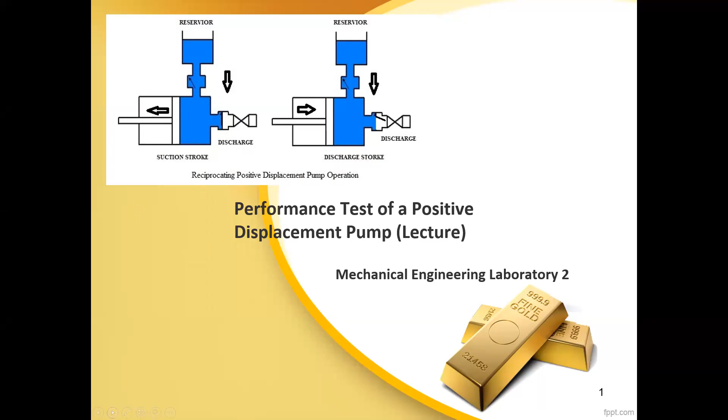Ang reference natin is yung power plant ni Potter. So, reciprocating pumps. For many years, reciprocating pumps were the only type of pump used in power stations. Today, they are used only where the flow is too small for the satisfactory design of centrifugal pumps or where there is moderate capacity with high head. High head, moderate capacity.

So, approximate ranges of application of reciprocating and centrifugal pumps are indicated in Figure 1. So, ito yung range niya. Capacity, yung boundary. Reciprocating dito, side, ito. Tapos, yung centrifugal, itong side. So, ito yung mixture, sa mga service range.

So, pag nagpipili kayo ng pump, pumasok dito, 100 GPM, then 1,000 feet. So, reciprocating pump yung gamitin mo. Hindi pwede yung centrifugal kasi ang baba ng flow niya. Okay? So, specific locations of reciprocating pumps in modern power plants include condensate and boiler feed pumps in small installations, evaporator feed pump, fuel oil pump, chemical pumps for feed water treatment, etc.

Kaya hindi laging centrifugal. Among advantages of reciprocating pumps are their flexibility of operation, their nearly constant efficiency for wide ranges of changes in capacity and head, and their ability to handle small volume at high head. Disadvantages include oil contamination of the steam, packing and valve troubles, pulsating flow and head, higher cost, greater floor space, and complexity of moving parts.

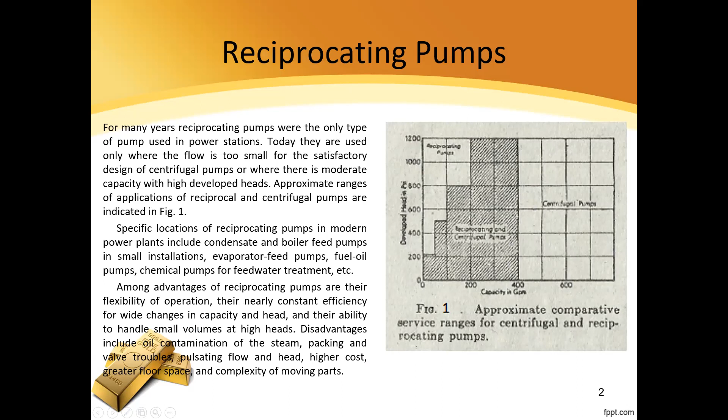Reciprocating pumps have been classified previously sa mga subject nyo as A, direct acting, and B, indirect acting. A direct acting pump of Figure 2 is motivated by steam force on the steam piston. So, nag-supply siya ng power is yung steam. So, direct acting. Yung iba, indirect is yung electric. Diba? Yung piston, minumove ng rotary power.

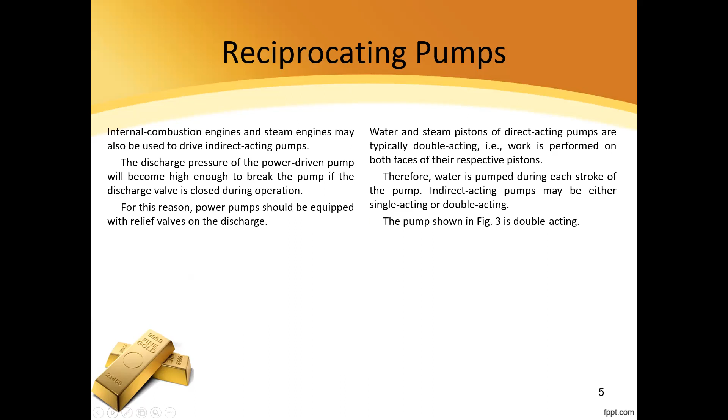Water and steam pistons of direct acting pumps are typically double acting. So, typically, both sides ng piston, merong liquid or steam. Therefore, water is pumped during each stroke of the pump. Forward stroke, backward stroke, napapump siya. And indirect acting pumps may be either single acting or double acting. The pump shown in Figure 3 is double acting. So, both sides meron.

Another classification of reciprocating pumps indicates the number of water cylinders contained in the pump. Those with only one water cylinder are known as simplex pumps, Figure 4. Those with two water cylinders are duplex pumps. Those with three cylinders are triplex pumps. When the pump is direct acting, there must be a steam cylinder for each water cylinder. Okay.

So, cylinder and stroke dimensions for reciprocating pumps are always designated in inches, with the diameter of the steam cylinder first, normally sa English units. O sa SI, standard na is yung converted from English units. 10 inches is 254 mm. Okay? The liquid cylinder next, and the stroke last.

Okay? So, a 6x4x10 pump would have a 6-inch diameter steam cylinder, 4-inch water cylinder. Two cylinders there, and a 10-inch stroke. But this is for single acting because there's only one cylinder, one combination of cylinders.

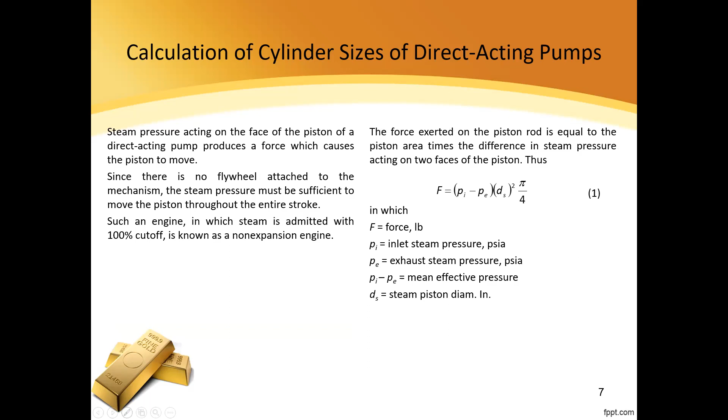Okay, so then EM F is equal to EM times pi over 4 DS squared times PI minus PE, equal to pi over 4 times DL squared times PD minus PS. So DS, diameter of steam piston, is DL times square root of PD minus PS over EM times PI minus PE. Okay, so equation 4 indicates that the diameter of steam piston is a direct function of the diameter of the liquid cylinder. But the liquid cylinder diameter obviously must be determined from the quantity of liquid, length of the stroke, and number

of strokes per minute. So a stroke may be defined as the travel in one direction of the connecting rod from one extreme position to the other extreme position. So a piston will require 2 strokes or 1 cycle to return to its original starting point. So 1 cycle is 2 strokes. So piston displacement for multiple cylinder pump is PD equals pi over 4 DL squared L S N over 231, which is equal to L S N times DL squared over 294.

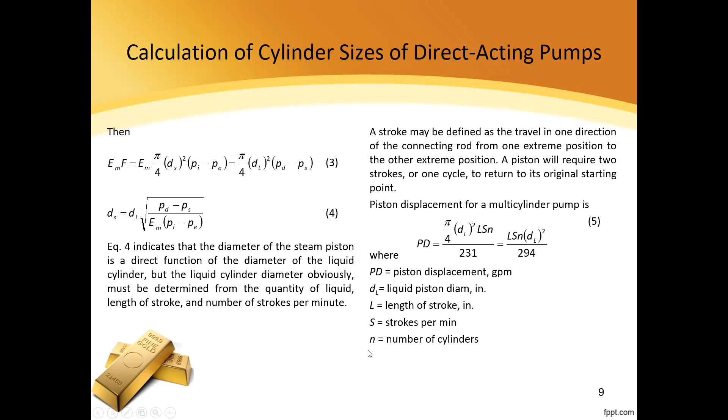Even when a reciprocating pump is in good condition, it will not discharge a quantity of liquid equal to piston displacement because of leakage past the packings and valves. Also, the pistons do not always travel the same distance during each stroke of a duplex pump. Usually, the customary definition of volumetric efficiency, Ev, is the ratio of the actual volume discharged to the piston displacement. Slip is 1 minus volumetric efficiency.

So, slip is 1 minus Ev. So, modify equation 5. The actual discharge from the pump in GPM is equal to PD times 1 minus slip, or LSN times DL squared times 1 minus slip over 294. So the magnitude of slip will depend on the type of valve and the condition of the pump.

Slip will vary from 2% for pumps in good condition to as much as 40% or more for pumps in poor condition of repair. Taking into account the types of valve employed in pumps for power plant service and the average state of repair of power plants, slip may be estimated as 10 to 20% when selecting the pump. Malaki rin. It is always wise to choose a reciprocating pump that is slightly too large rather than one that will just meet the capacity conditions.

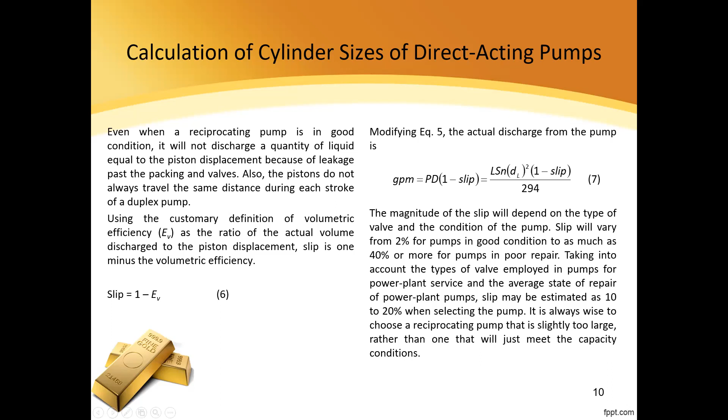So, example number 1: determine the discharge in pounds per hour and gallons per minute of a 10 by 6 by 12 duplex pump operating at 35 strokes per minute if the slip is 7% and the water is at 150. Okay? So, given a 10 by 6 by 12 duplex pump, S is 35 strokes per minute, slip 0.07, water at 150.

So, discharge in pounds per hour and gallons per minute, ito yung required solution. For duplex pump, N is equal to 2. So, GPM is PD times 1 minus slip, LSN DL squared times 1 minus slip over 294. L is 12 inches, DL is 6 inches. So, GPM is 12, yung length mo, times 35 strokes per minute times 2 times 6 squared times 1 minus 0.07, over 294, is 95 GPM. So, ito yung answer mo.

Okay. So, in pounds per hour, the water at 150 specific volume is 0.016343 cubic feet per pound from steam table, yung v sub f. Our density is 1 over 0.016343, 61.19 pounds per cubic feet. Wag ka mag-assume ng 1,000 or 62.4 kasi may given kang temperature.

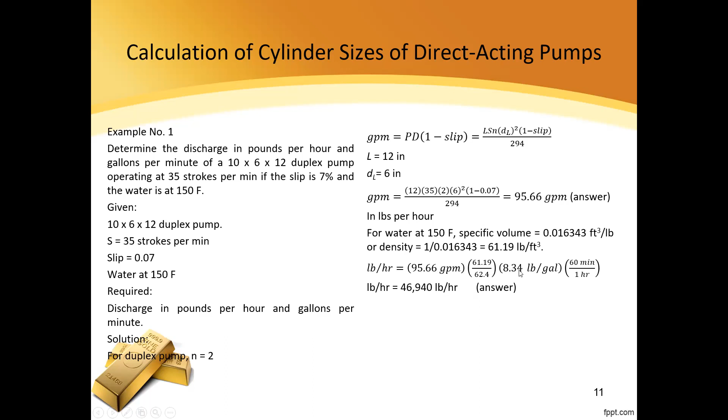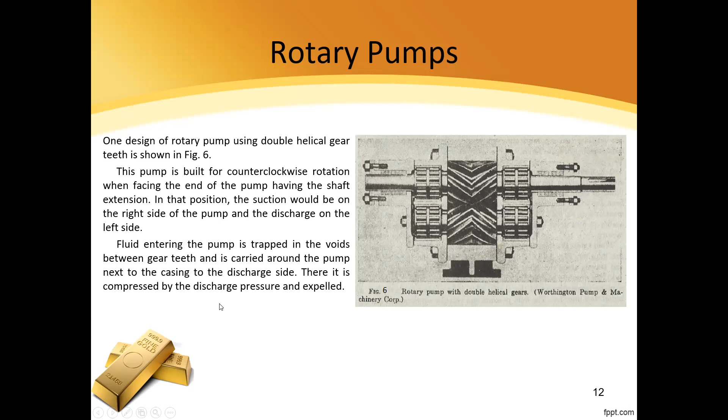So, explain niya. Fluid entering the pump is trapped in the voids between gear teeth and is carried around the pump next to the casing to the discharge side. There it is compressed by discharge pressure and expelled. Double helical gear teeth have two advantages. One, there is no end thrust.

And two, none of the fluid is compressed between the top land of one gear and the bottom land of the other when the two gears mesh. Any fluid trapped between the two lands has its pressure relieved by the channel effect of the helical teeth, leading back to the discharge space. Leakage from the discharge to suction can be reduced by cutting the teeth with little or no root clearance.

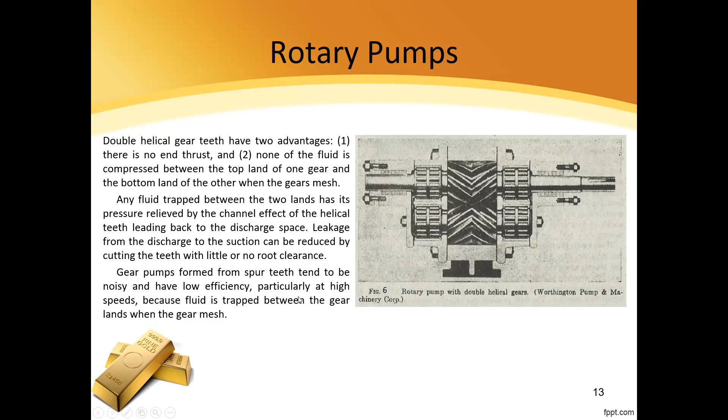Gear pumps formed from spur teeth tend to be noisy and have low efficiency, particularly at high speed, because fluid is trapped between gear lands when the gears mesh. So helical to, diba? Other rotary pumps have impellers formed as lobes, eccentric pistons, eccentric guide vanes, or single and double screws. So, walang picture dito. Check nyo na lang sa internet.

Rotary pumps have some characteristics of reciprocating pumps in that they are positive displacement and that they will develop dangerously high pressure if operated against a closed discharge. However, they are particularly suitable for small capacities. The principal application of rotary pumps in steam power plants is for handling fuel oil, lubricating oils, and control fluids such as non-inflammable synthetic resins.

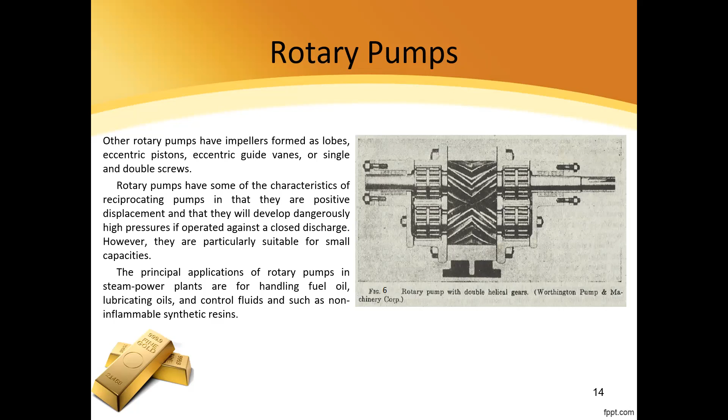Okay? So, this is the end of this topic, positive displacement pump. Ito yung definition, suction, operation, and compression.